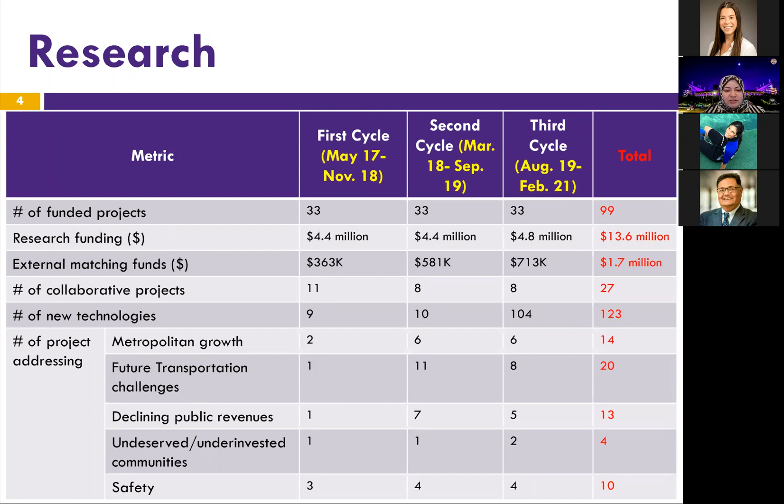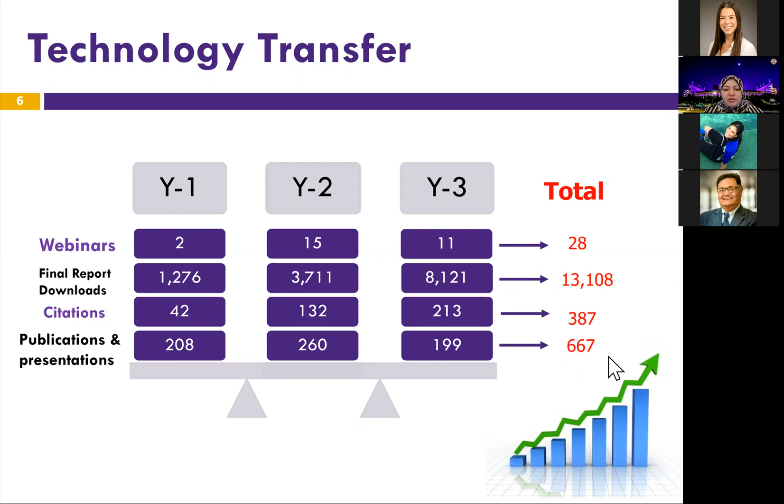With respect to tech transfer, we host webinars on a quarterly basis. To date, we have hosted 28 webinars. We also post all our publications, whether they are reports, presentations, or journal publications, on our website, and we look at the downloads, and as you can see, we have a large number of downloads.

With respect to workforce development, we host professional society related events and we participate in them. To date, we have participated in 182 events, and we also host seminars and workshops where we educate the industry on new technologies developed or focus on solving different challenges together.

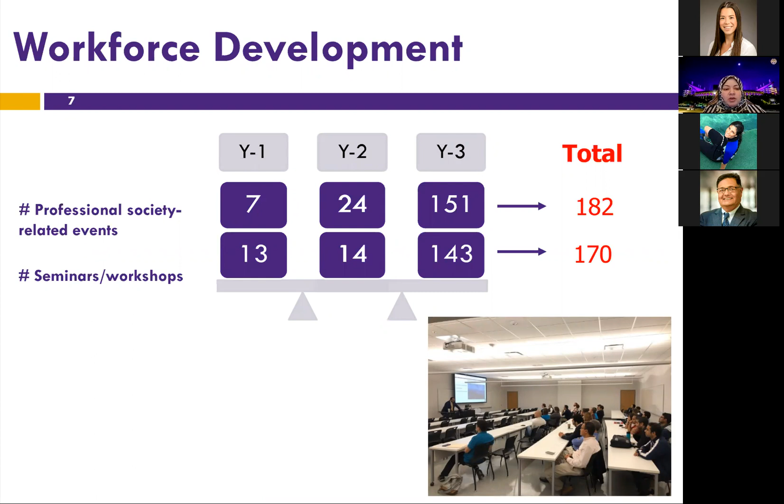We want to make sure that we are performing up to standard, so we have center metrics and we continuously monitor them. This is a snapshot of some of our metrics.

With respect to tech transfer, we look at the number of commercialized, patented, or licensed research products, and to date we have 21. We also look at the number of memorandums of understanding that we sign with our stakeholders, and to date we have 19.

With respect to education, we look at how many students are actually benefiting from our educational modules, so we look at the number of views, and we have almost 4,000 views to date. And how many students participate in our STEM events, and we have about 3,300 participating to date.

As for workforce development, we look at the number of people who attended the workshop, and we ask them for feedback by filling surveys. We have a little over 10,000 that have attended our workshops and seminars to date. We also look at how many of our stakeholders sponsor our events and how much they've contributed. We have 47 sponsors who have contributed a little over $400,000 to date.

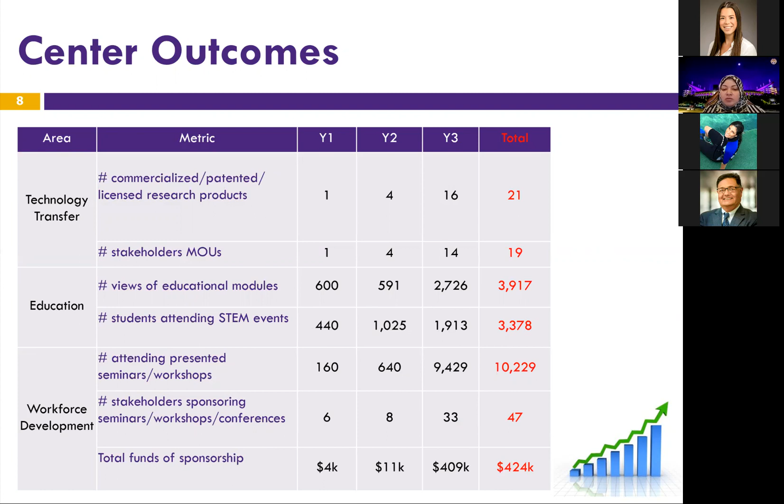As I said, we don't just focus on research, but we also focus on implementation. So this slide shows just some pictures of different implementation projects that we have to date.

So right here, these are implementation of pavement markings in a pavement marking project. And here, this bridge is constructed with ultra high performance concrete that was developed in New Mexico. And right here is actually the road in front of our College of Engineering building at LSU, and this mix is developed by us.

And I'm going to give a presentation. So part of my talk is going to be about ECC, but this is low-cost ECC.

And the funny part, and I'm sure Dr. Al-Qadi will get a laugh out of this, this is not a competitor to concrete. This particular mix is an actual competitor to flexible pavements. It has a very low compressive strength, but an extremely high ductility and flexibility, and so it behaves like a flexible pavement. It has been in place for a year and a half with heavy bus traffic, and it's performing very well, not a single crack.

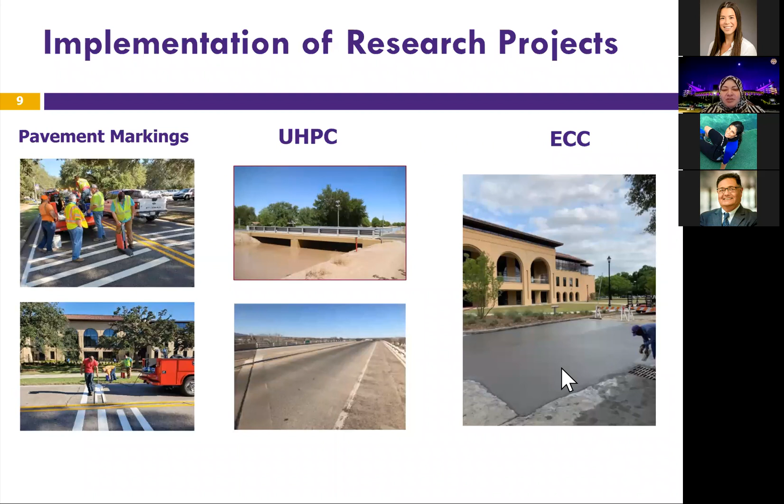In addition to this, we do a lot of many more activities. So this picture just shows some of the activities. If we look at this top picture right here, this was an event that was sponsored by Prairie View A&M,

which is a historically Black institution that is part of the consortium. They were exposing their freshman students to the field of transportation to increase the participation of students in transportation. This event included more than 70 students.

The second one is an actual implementation project that resulted from a Tran-SET project, and it was led by University of Texas at Arlington. They are currently doing a full depth repair using ultra high performance fiber reinforced concrete at the Dallas-Fort Worth airport, and it saved them over $1.5 million just because they didn't have to close the runway for a long time due to curing of concrete.

The third picture is from Arkansas State, where the students participated in an artificial intelligence demonstration. 30 students were featured in this demonstration.

The one on the left side at the bottom is an event that was hosted by Dr. Zahid Hussain and his students. They hosted an event for the industry, the DOTs, to educate them about their flowable fill concrete, the FCC mixes. This event was attended by 40 stakeholders.

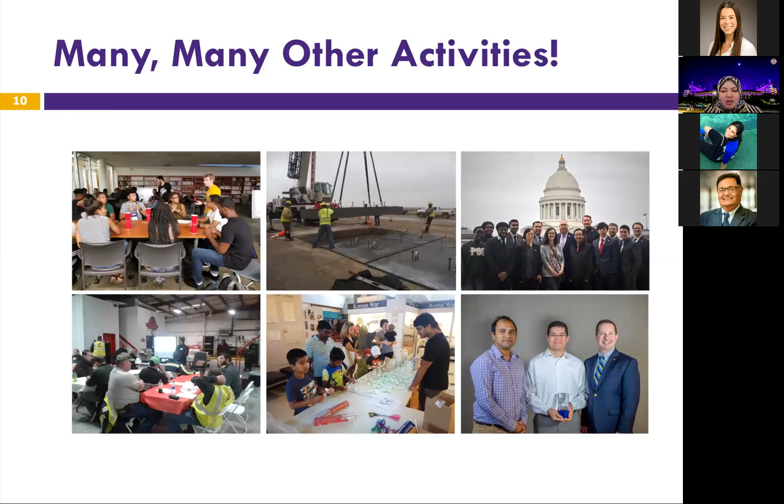This is a quick introduction about Tran-SET and what we do, and of course, we collaborate with a lot of other centers. I would love to collaborate with ICT as much as possible.

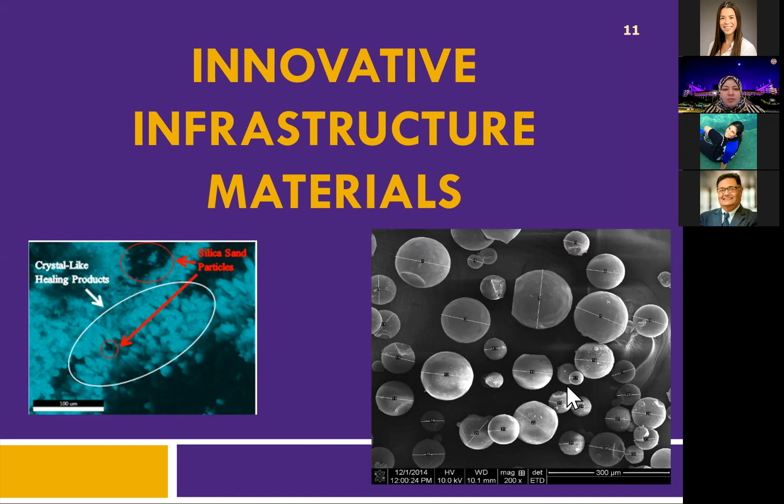So now I'm going to start talking about research, and I'm going to talk about innovative infrastructure materials. Here the focus goes more into our research group at LSU and our partners that work with us. We, over the years, have developed a lot of sustainable technologies, focusing on introducing new technologies that can enhance the sustainability, resiliency, and durability of the infrastructure.

A long time ago, we developed photocatalytic pavements. If you don't know what that is, it's a pavement that has nano titanium dioxide capable of absorbing pollutants like VOCs, NOx, and SO2s that are produced by traffic car mufflers, and neutralize them into salts that are washed away by rain from the surface of the pavement.

We had the first field studies in the US that tested both asphalt and concrete photocatalytic pavements. This picture is from a product where we recycled beer glass, like glass cullets, in asphalt shingles. We designed a new generation of shingles that can be a solution to the urban heat effect, and we actually applied for a patent for this technology.

This is self-healing concrete, and we have a lot of work going on in this area where we heal concrete with microcapsules that contain chemicals that can produce calcium silicate hydrate, so heal concrete with concrete. We also do a lot of work in bacteria self-healing concrete.

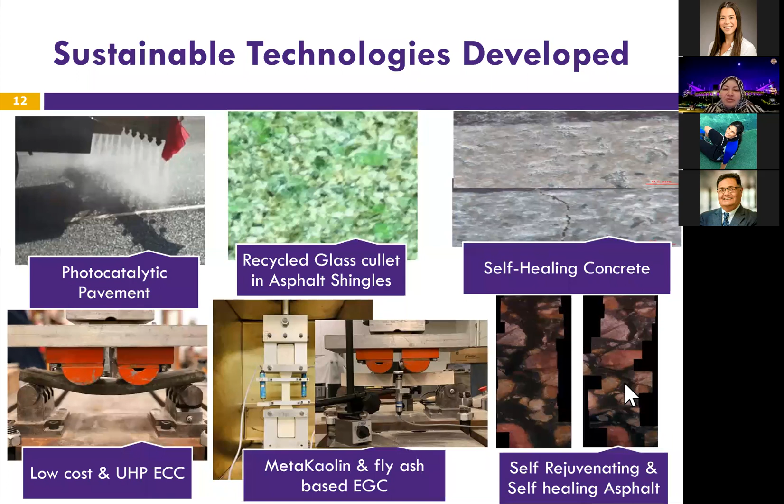The lower three pictures represent the technologies that I'm going to talk about today. We developed low-cost and ultra-high performance ECCs. I'm going to be talking about the low-cost ECC today. We also developed a new generation of material called engineered geopolymer composites, which are metakaolin based and fly ash based. We also developed self-healing, or self-rejuvenating, asphalt, which I'll also talk about briefly. So let's start with the low-cost engineered cementitious composites, ECCs.

There is a saying, if it isn't cracked, it ain't concrete. So we drive around all over and there are cracks everywhere in the concrete. Concrete is a very important material that we utilize not just in our pavement or even the infrastructure, but even in our commercial buildings, etc.

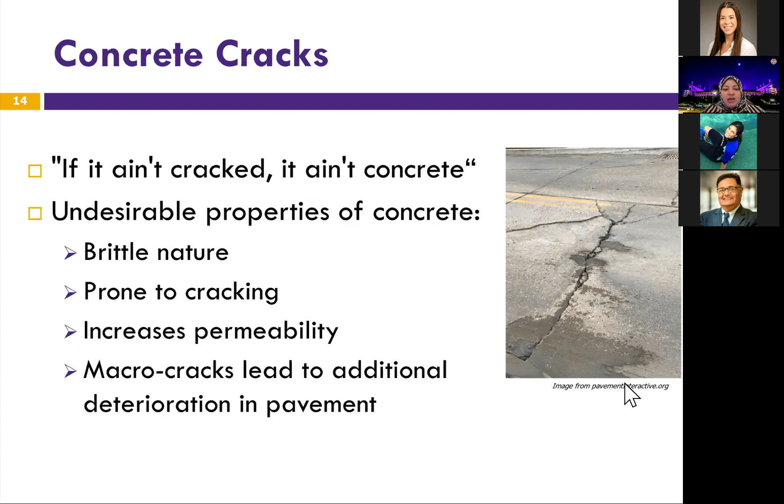Unfortunately, it's a brittle material, so it's prone to cracking. It also has permeability that increases over time, which allows deleterious substances to enter into the structure of the pavement, causing damage and lack of durability. In addition, concrete expands and contracts, and it has a high coefficient of expansion, which means we need joints in order to avoid cracks. But these joints are a major deterioration mechanism, so we see things like joint faulting, spalling, corner breaks, etc.

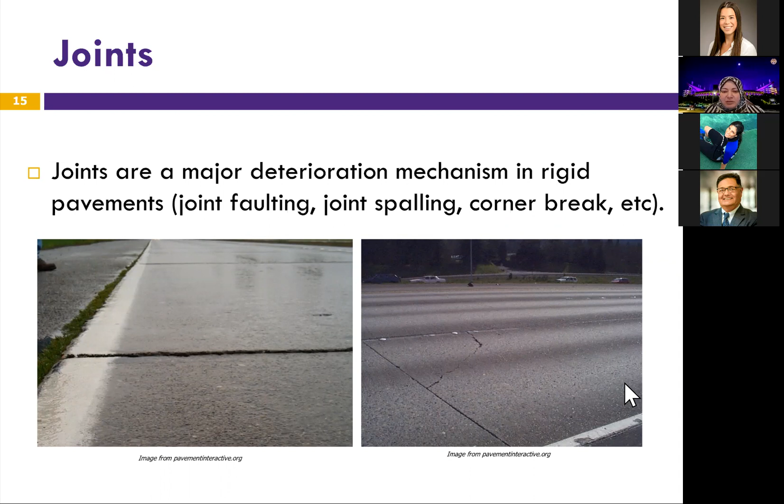One solution to a lot of these problems is the ECC. ECC is not new; it was developed about a couple of decades ago by Dr. Victor Li from the University of Michigan. The main advantage of ECC compared to concrete is that it exhibits pseudo-strain hardening after cracking. This leads to an increase in load carrying capacity with a significant increase in deformation, which allows us to produce bendable concrete like you see right here in this picture.

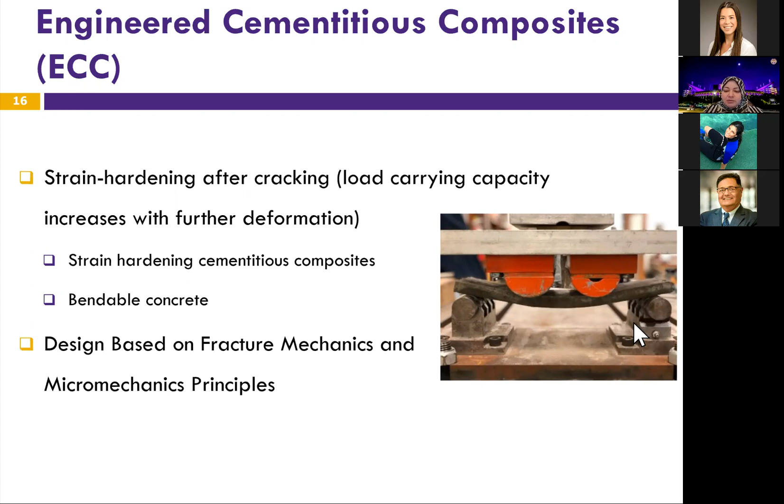So how do we design ECC? There are two basic criteria that must be met for successful design of ECC materials: the strength criteria and the energy criteria. The strength criteria warrants adequate fiber bridging capacity upon crack initiation, while the energy criteria guarantees the occurrence of steady state crack propagation. The strength criteria require that the maximum fiber bridging capacity, sigma naught, is larger than or equal to the matrix cracking strength, sigma critical. The energy criteria require that the complementary energy of the fiber bridging relation, JB, is greater than or equal to the crack tip matrix toughness, J tip.

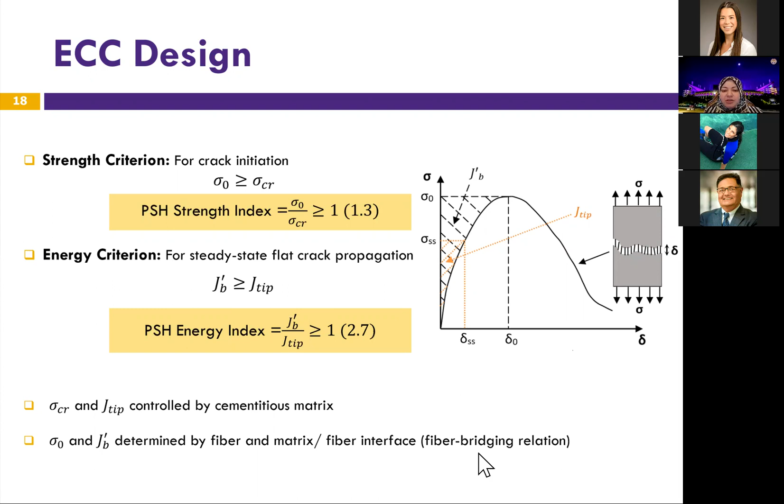The design of ECC is based on fracture mechanics principles. Sigma critical and J tip are controlled by the cementitious matrix, while sigma naught and JB are controlled by the fiber matrix interface. Both criteria have to be satisfied for us to get the pseudo-strain hardening behavior, and I'm going to talk about that more in a second.

So if ECC is so good, why is it currently not being used? It's because ECC has limitations. It's very expensive, and that's one of its most major limitations. It also has a high environmental footprint because it uses a lot of cement. And it's not practical compared to regular concrete because we have to put a lot of fibers, specific oil-coated PVA fibers, according to Victor Li at 2% volume fraction. That much fiber needs special mixing requirements for good dispersion, so not everybody can install it properly on site.

That's why it has not been advancing as quickly as we had hoped. When we started this research, we asked: can we solve these problems? We started looking at low-cost, green, and readily available ingredients that can replace some of the components of ECC.

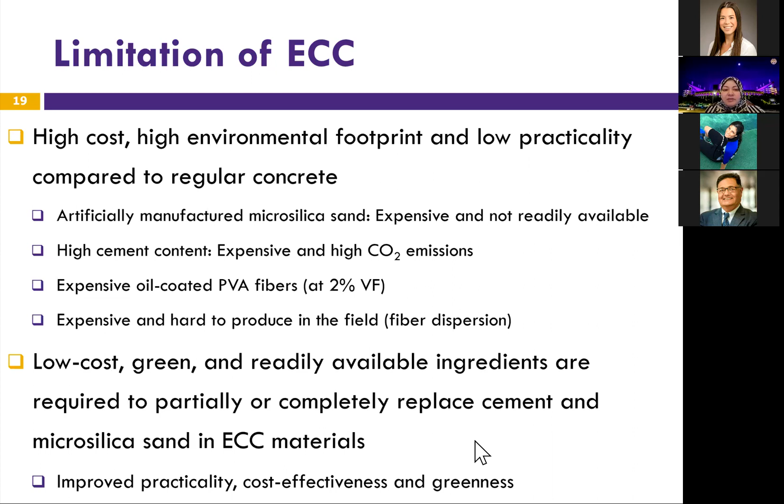So we can actually produce ECC that can be used in the field, we focused on developing low-cost ECCs. We started testing mixes that can work with non-coated PVA fibers to reduce fiber cost, and we also reduced the fiber volume fraction from 2 to 1.5 and 1.75, and got that to work.

Another expensive ingredient in ECC is microsilica sand, which has to be very round, very soft, very small, fine sand. So we replaced it with locally available materials present in Louisiana and Region 6. We also started replacing some of the cement content with high fly ash class F content, and experimented with using recycled content from crumb rubber.

We developed mixes that work, and I'm going to show you snapshots of what we've done. We also looked at other sources of ash besides fly ash, because fly ash, as we know, is going to run out very soon.

So we experimented with another type of ash that comes from sugar cane, called processed bagasse ash. We tested it as a cement replacement, and we also tested raw bagasse ash as a sand replacement.

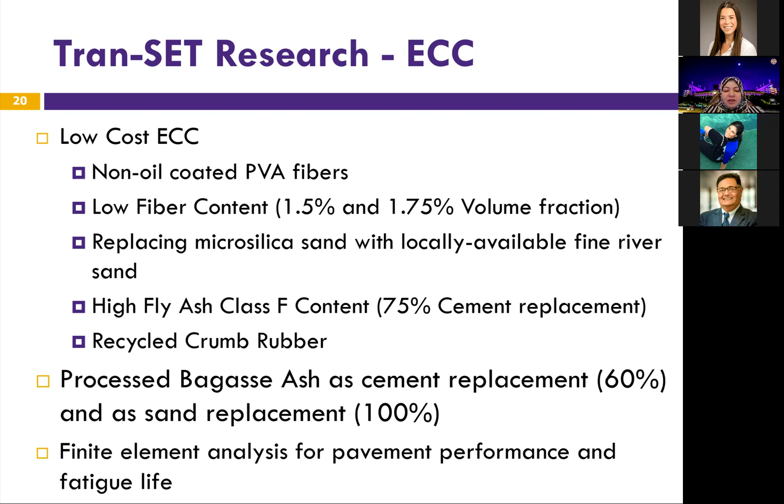We also did a lot of work with small field site implementations, and I'm going to show you some of these in a second. But we also built a finite element analysis model to predict pavement performance and fatigue life of ECC pavements. I'll start by giving more details about the low-cost ECCs that have fly ash and crumb rubber content.

In addition, replacing sand with crumb rubber caused a reduction in compressive strength. This drop is attributed to the defect-like behavior of crumb rubber in the ECC specimen, which probably reduces bonding within the cementitious matrix, in addition to rubber having lower stiffness.

We also saw that increasing the percentage of fly ash in the mix decreased the compressive strength. This can be attributed to the fact that fly ash may limit the secondary hydration reaction at 28 days. We only tested at 28 days, but I believe if we had tested later the compressive strength would have increased.

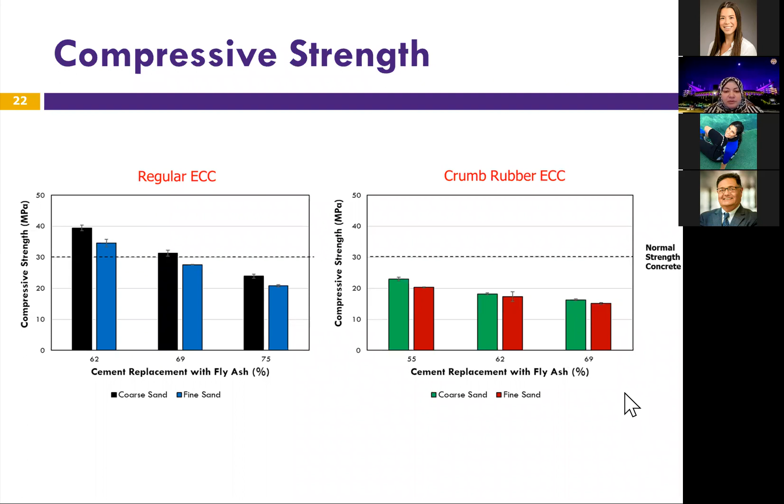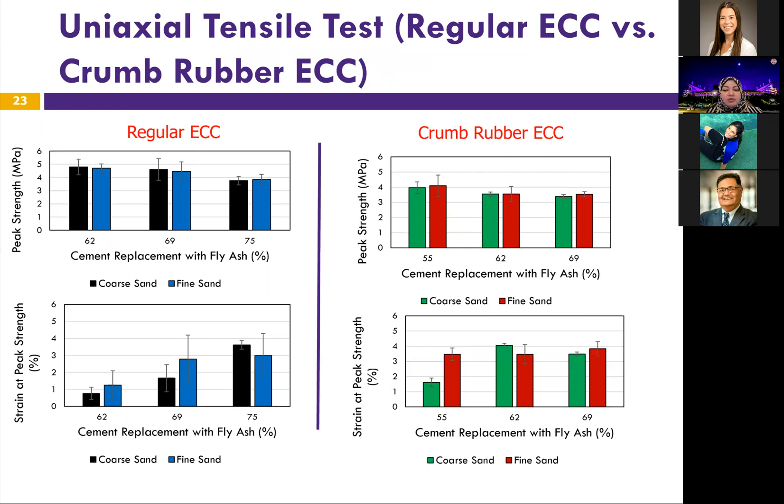Some quick conclusions: increasing the cement replacement with fly ash increases the ductility of the composite, however compressive, tensile, and flexural strengths were negatively affected. Chrome rubber produced a significant reduction in compressive strength and flexural strength, yet deformation capacity and strain were dramatically improved.

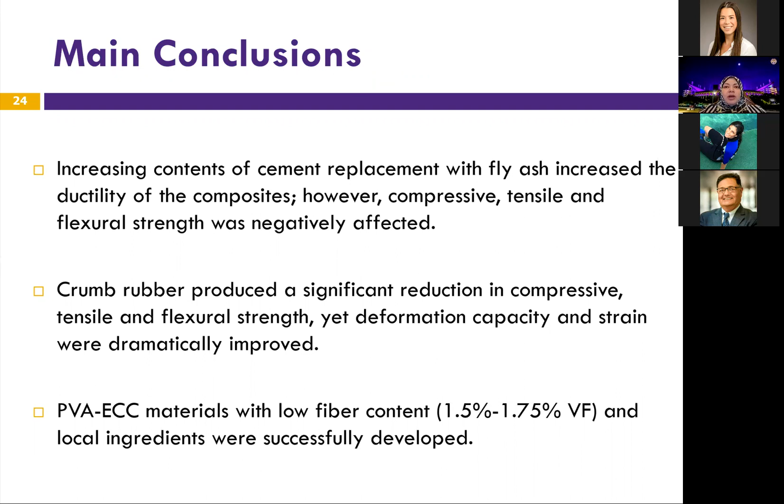Most importantly, we were able to develop PVA ECC materials with much lower fiber content—going from 2 to 1.5 and 1.75 volume fraction, drastically reducing cost. We successfully integrated local ingredients into these mixes, so ECC is now more cost competitive and can be used as a replacement in concrete pavement applications.

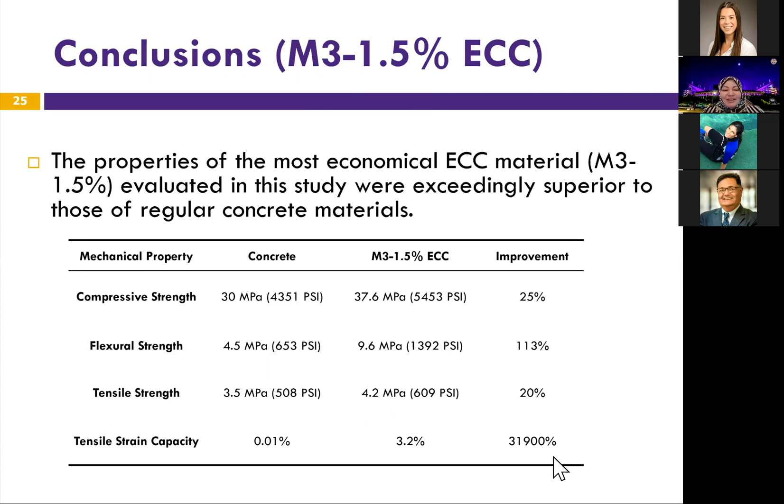This slide compares one of the mixes we developed, M3 at 1.5% volume fraction of fibers, with regular concrete. As you can see, it has 25% more compressive strength, 113% more flexural strength, 20% more tensile strength, and a 31,900% increase in tensile strain capacity, which is amazing.

Now I'm going to talk about the low-cost ECC that we created with bagasse fiber. So we first looked at fly ash, and now we're looking at bagasse fiber. What is bagasse fiber? It's a byproduct of sugarcane production, and it's a huge waste product in Louisiana.

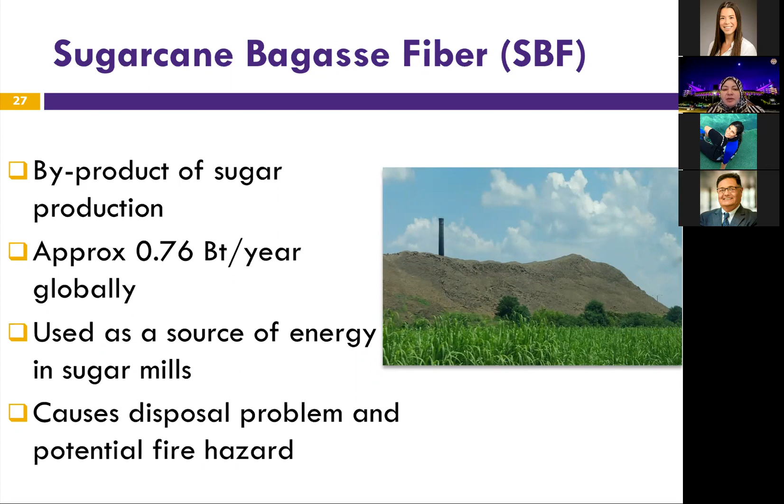Globally, 0.76 billion tons are produced each year. Some sugar mills use it as a source of energy, but only a little bit, and everything else is a problem because it's a fire hazard and needs to go to landfills.

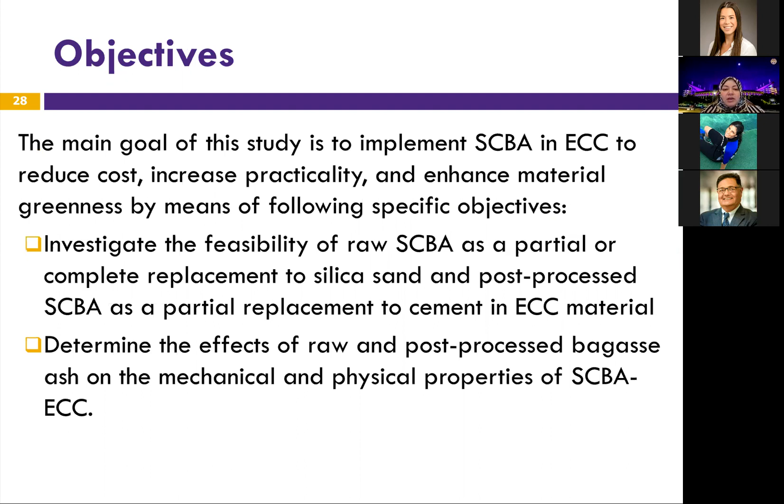So we said, can we process this bagasse ash so we can actually use it in ECC? We were thinking of two usages for the ECC: one as a cement replacement to reduce the content of cement, and one as a sand replacement to eliminate the river sand or the microsilica sand.

So we had to process the sugarcane bagasse ash first. This is what the sugarcane from the mill looked like. We dry it at 65 degrees and then sieve it, and by doing that we remove the coarse particles and get what we call raw sugarcane bagasse ash.

This is what we used as a sand replacement. If we further burn the raw bagasse ash at 450 Celsius for 3 hours and grind it at 300 RPM for 35 minutes, we get what we call processed bagasse ash. And this is what we use as cement replacement.

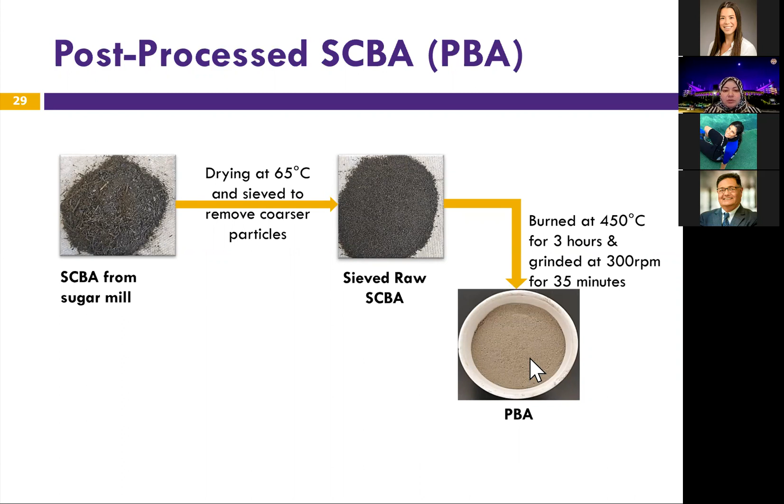We also analyzed the composition of the raw and processed bagasse ash using EDS. As you can see from the analysis, the raw bagasse ash is mainly composed of silicon dioxide and carbon. Of course, the carbon comes from unburned sugars. But if you look at the pozzolanic components, which is the silica oxide, aluminum oxide, and iron oxide, in the raw bagasse ash you get 52.6%, which makes it classified as a class C pozzolan according to ASTM.

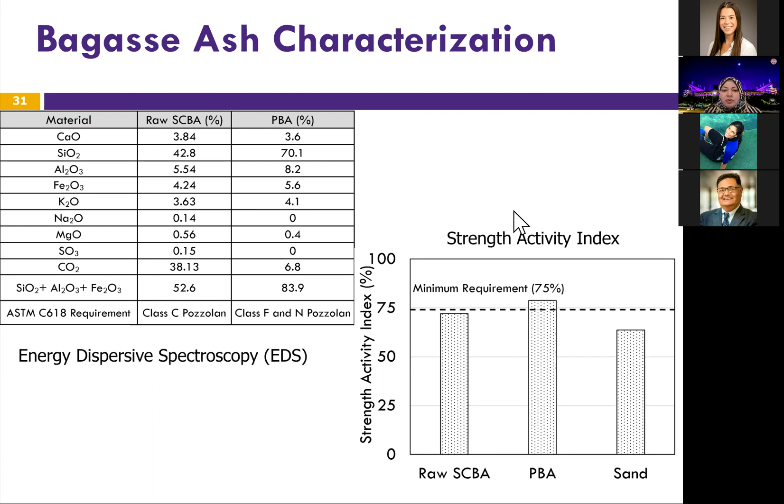Although we have a lot of amorphous silicon dioxide in the processed bagasse ash, which indicates a high potential for pozzolanic activity, the observed decrease in compressive strength can be attributed to the strength activity index. We saw that it was more than 75%, but it's lower than 100, so it's still not as high as it can be.

And the other thing is that since it's a pozzolanic material, we expect that it's going to take longer for it to reach its full strength, because the secondary hydration taking place can exceed the 28 days that we're testing at. It can take months or even years sometimes.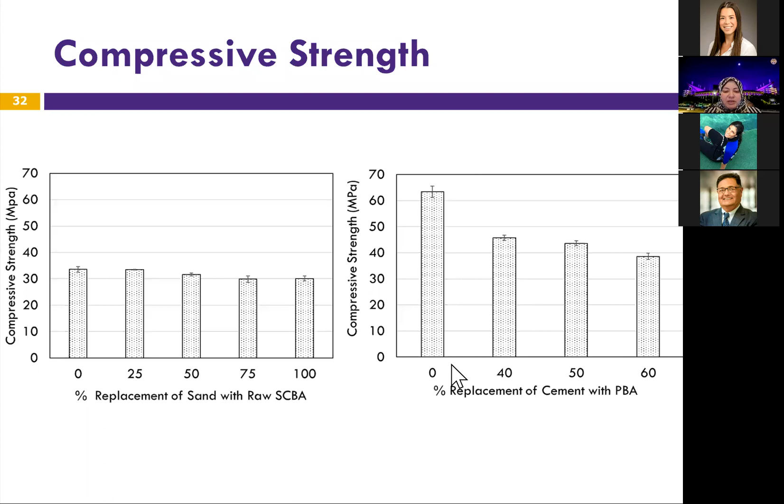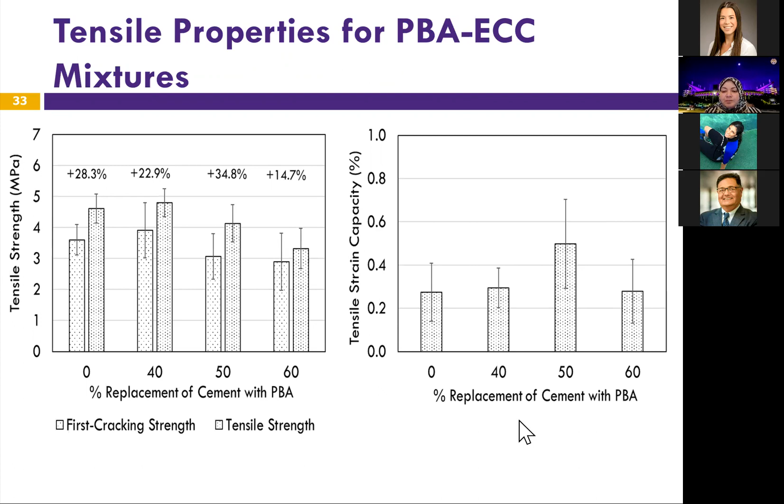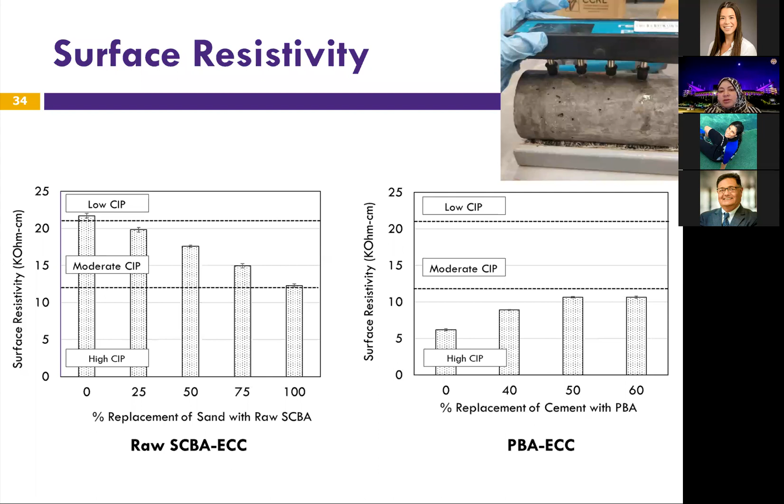Maybe this can be attributed to the fact that the fibers in the matrix hurt the pore structure, which allowed ions to penetrate through the matrix.

So, some conclusions. The most interesting part is that the raw bagasse ash and the processed bagasse ash both met ASTM standards to be used as a pozzolanic material. In general, compressive strength decreased with the increase in raw bagasse ash and processed bagasse ash. An improvement in the tensile ductility of 311% compared to control was observed in some of the mixes.

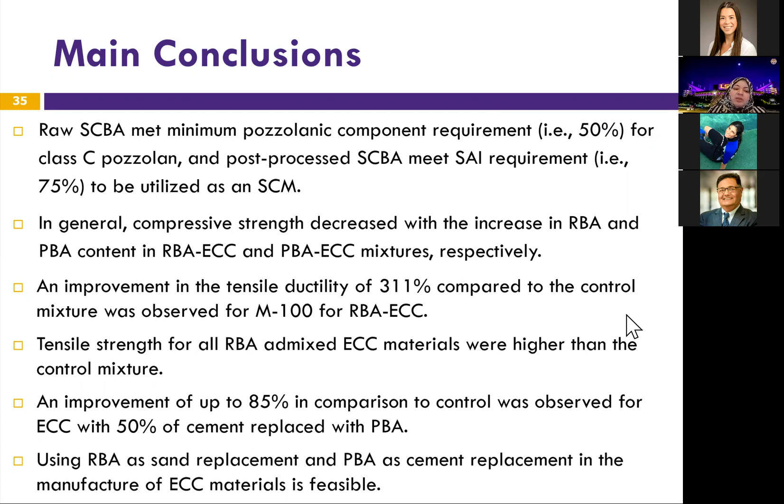The tensile strengths for all raw bagasse ash admixtures were higher than the control. An improvement of up to 85% compared to control was observed for ECC with 50% cement replacement with processed bagasse ash. So in conclusion, using raw bagasse ash as sand replacement and using processed bagasse ash as cement replacement is feasible, and that's going to reduce the cost of ECC drastically.

I'm not going to talk about the ultra high performance work we're doing because I wanted to visit different technologies, but I'll show you some ECC field applications we've done at LSU. When we started field implementation, we talked to facility services. All these people you're seeing are from LSU facility services.

We wanted to first try it in a place that does not have traffic, so we talked about sidewalks. The interesting thing about the LSU campus is that we have 100-year-old trees with huge roots, and they break the sidewalks over and over again. Facility services is very frustrated with this.

So we presented ECC as a solution because of its high ductility, and we installed it in a lot of the sidewalks. It has been there for 1.5 years. They don't even need to fix it. They loved it so much.

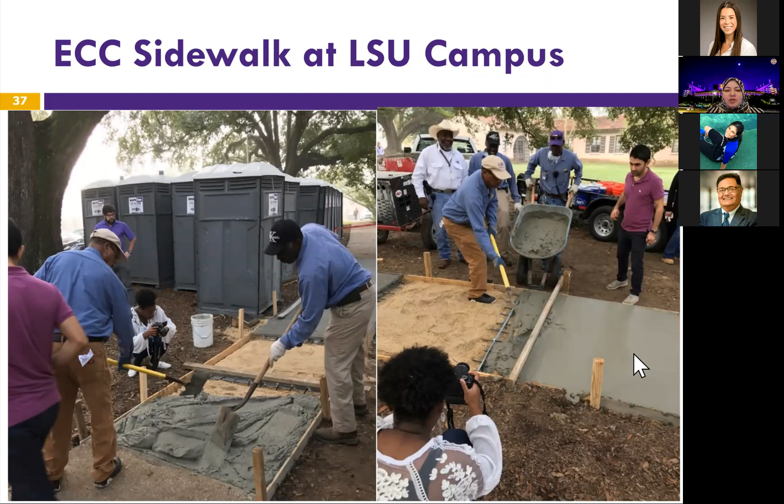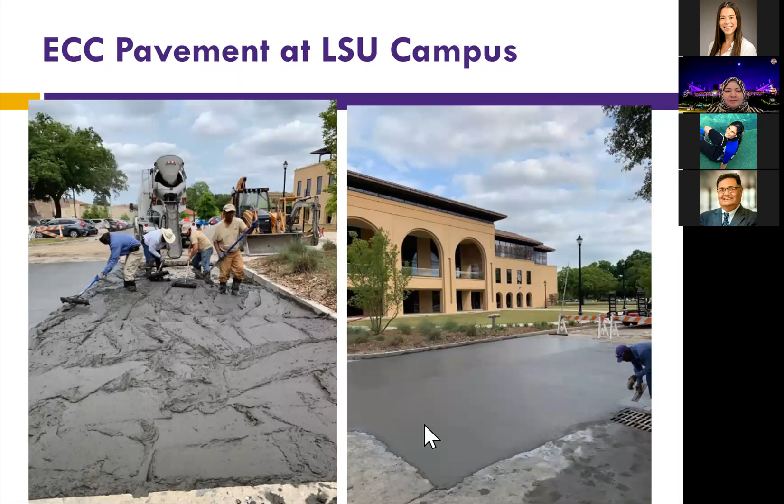They asked us to prepare some materials for them, and they use it for patching any cracks in the regular concrete all over campus. This is the mix I was telling you about at the beginning, which is in front of the College of Engineering building. And again, it has been performing very well.

We had a project where we wanted to do full-scale testing in an accelerated loading facility. So we built an ECC pavement in the Louisiana Transportation Research Center Pavement Research Facility. And you can see this is the loading wheel right here.

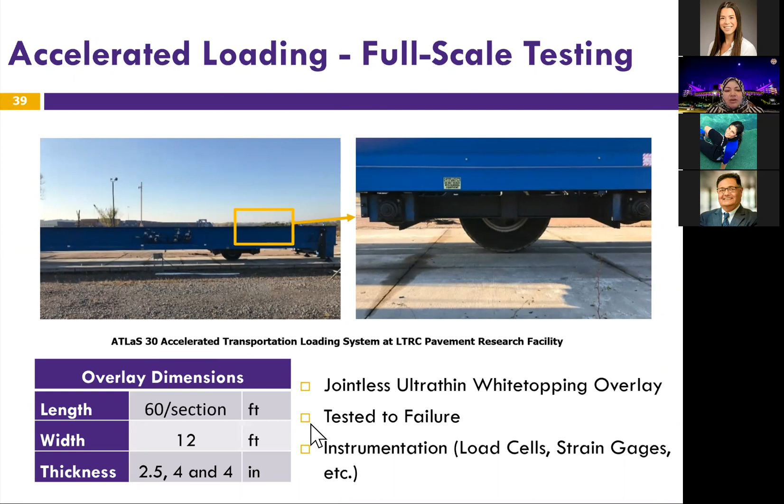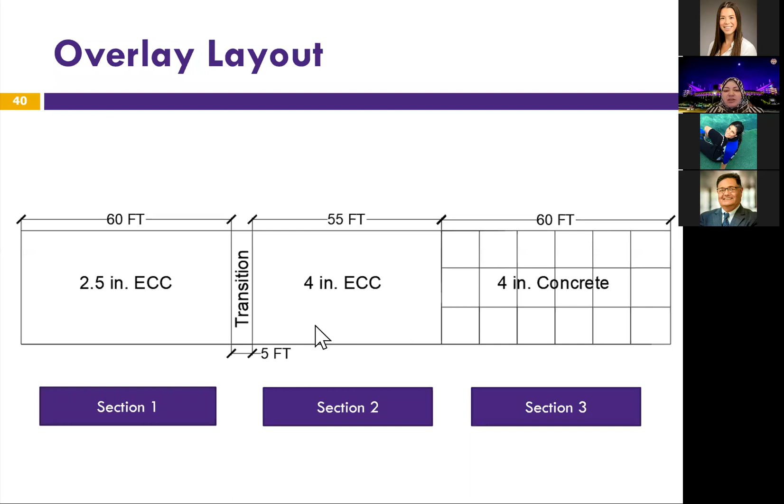It's an ultrathin whitetopping over an asphalt pavement, and we have 3 sections: a 2.5-inch thick ECC, a 4-inch thick ECC, and a 4-inch concrete that's going to be used as control. All the sections are instrumented.

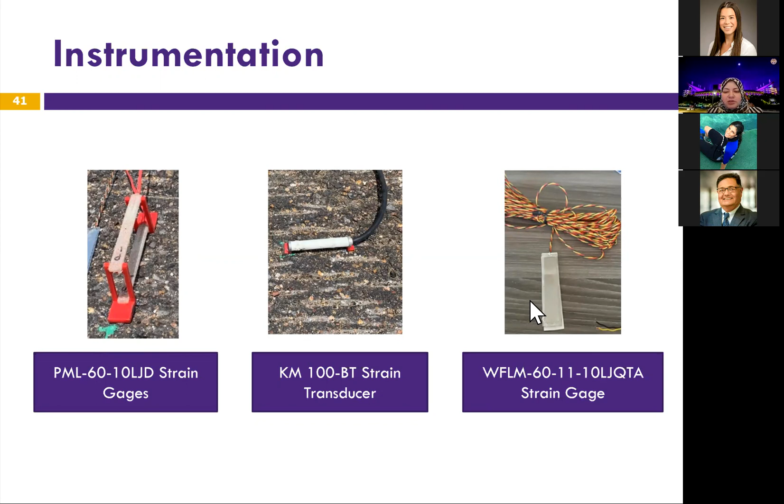As you can see here, we printed 3D supports for all the sensors so that they stay in place. This is a picture from the construction. We had 3 companies working with us: a concrete plant, Lemoyne construction company, and Icon.

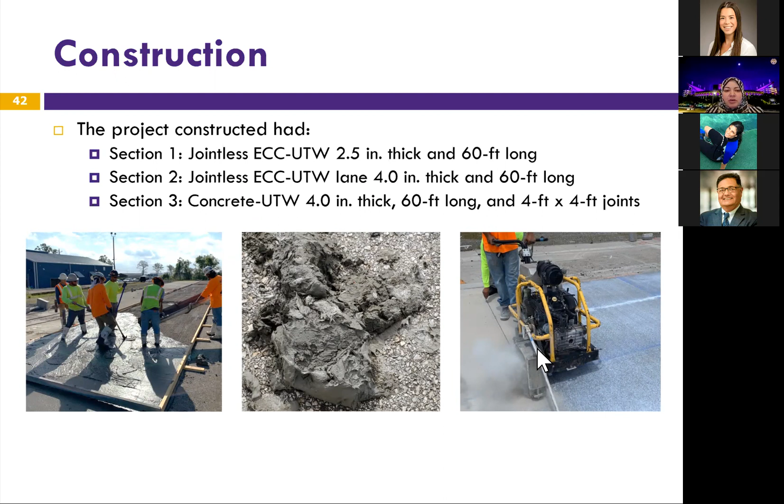We had workshops and webinars where we told them about the technology and how to mix it using their equipment. We also compared the mix that will come from regular construction equipment to what we're doing in the lab. We constructed the pavement, and now we're waiting for LTRC to start the loading so we can get some data. We have been collecting data on visual inspection.

Okay, with that, I'm going to shift topics to the next technology I want to talk to you about: engineered geopolymer composites, or EGCs. This work is a collaboration between our group at LSU and the Material Science Department at Texas A&M, led by Dr. Miladin Radovic. So what are EGCs? EGCs are nothing but geopolymer-based ECCs.

So why do we use geopolymers? The reason is geopolymers are better than concrete binders. If we compare them to Portland cement, we'll see that they have faster strength development because polymerization takes place much quicker than hydration does. It's more resistant to acid attacks and fire, and it's better at preventing corrosion of the steel reinforcement. In addition, it has a much lower footprint because geopolymer produces 44 to 64% less CO2 emissions compared to concrete. So why do we use it in ECC?

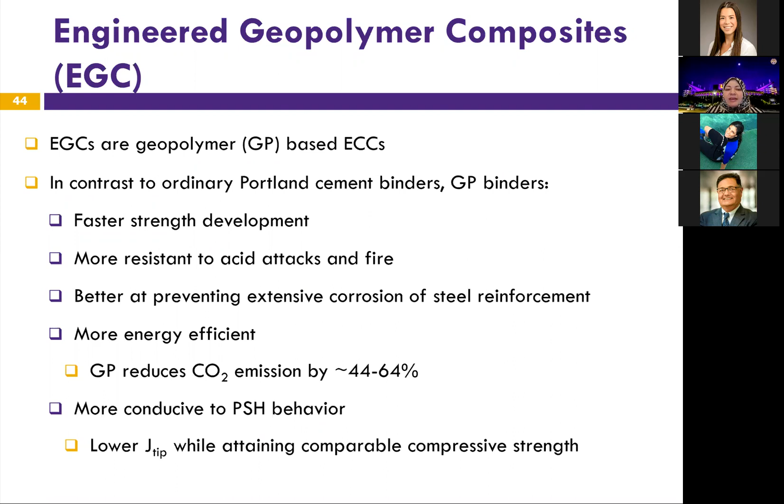If you remember the design criteria I talked about to get the pseudo-strain hardening behavior, with EGCs, with geopolymers in general, the J-tip that is needed to attain the design is much lower at comparable compressive strengths. So it lends itself to engineered geopolymer composites.

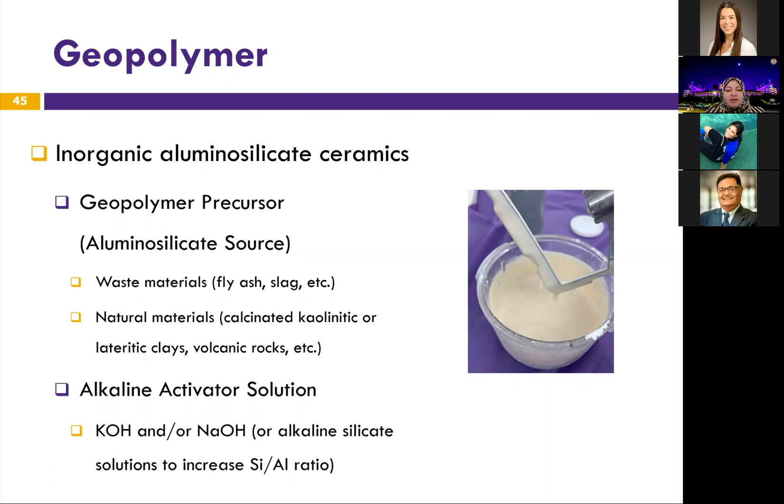Okay, so how do we make it? You start with a geopolymer precursor and an activator solution. The geopolymer precursor is an aluminosilicate source, and it can come from waste material like fly ash, slag, etc., or from natural materials like calcinated kaolinites. One example is the metakaolin that we used in this project. The alkaline activator solution can be sodium-based or potassium-based, and we sometimes add alkaline silicate solution to increase the silica to aluminate ratio.

So what we were trying to do here is develop mixes that can be used as engineered geopolymer composites. We wanted to develop mixes that were metakaolin based, which we're going to call MK, or metakaolin fly ash based, which we're going to call MKFA. This work started a year ago, and we had our first publication at this TRB. This work is going to continue with us for the next couple of years. But to design these mixes, we varied binder composition, aggregate types, and fiber type and content.

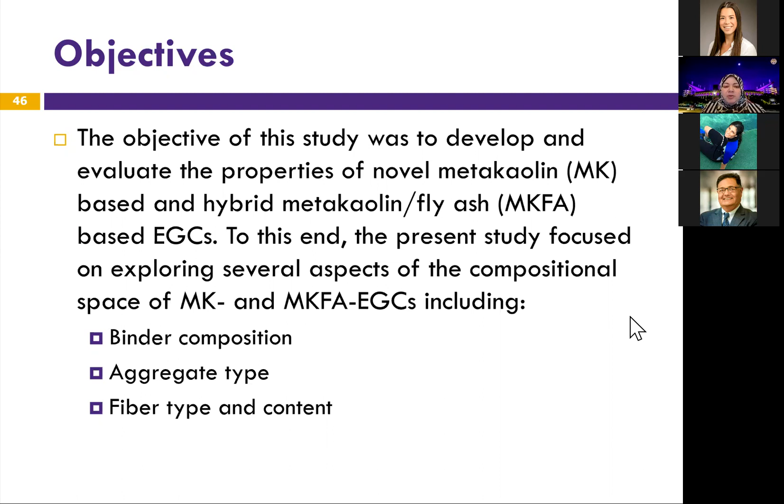So the ingredients that we used for that first project included the geopolymer precursor as either metakaolin or a hybrid between metakaolin and fly ash, used as 50-50. The activator solution was potassium hydroxide and sodium hydroxide mixed with silicon dioxide. And we tested two aggregates, river sand and microsilica sand. Then we tested two fibers. We used the first fiber that we used for our ECC, which is non-oil coated PVA fiber. But that is still more expensive than ultra high molecular weight polyethylene fibers. So we wanted to experiment with these two.

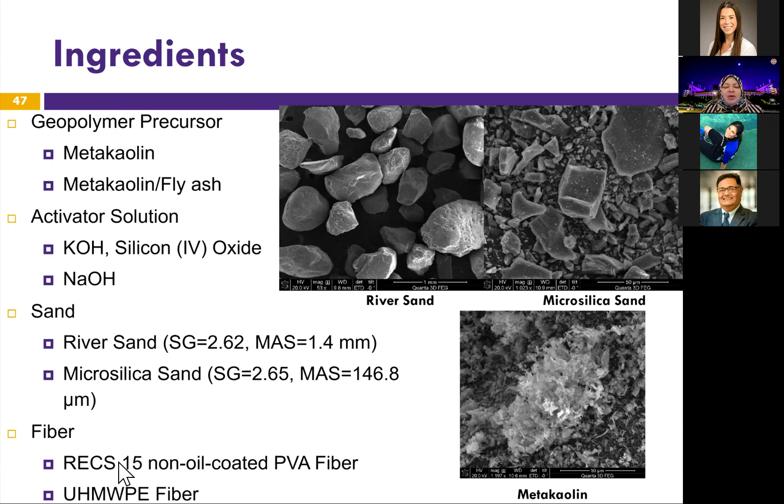And that's when one more partner from Texas A&M, Dr. Svetlana, joined the group. She, with her group, are developing the polyethylene fibers in their labs, which is really cool because I'm going to show you part of the results that's very interesting. This is very new. We got the first result of this about a month ago, and it needs a lot more work, but it's very encouraging.

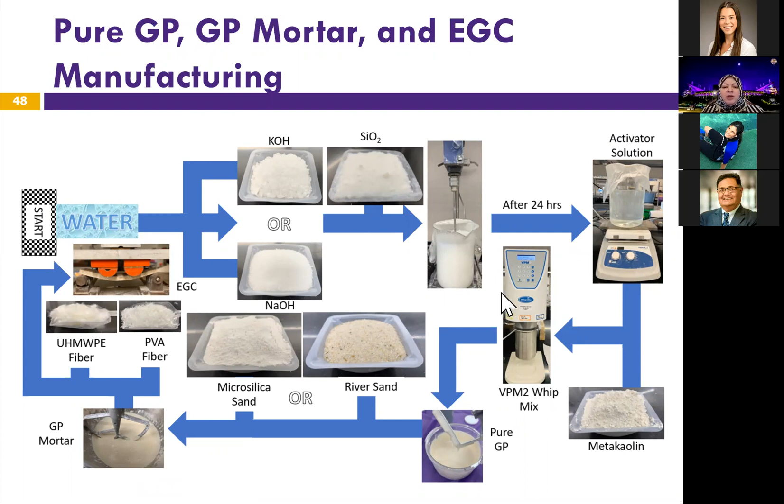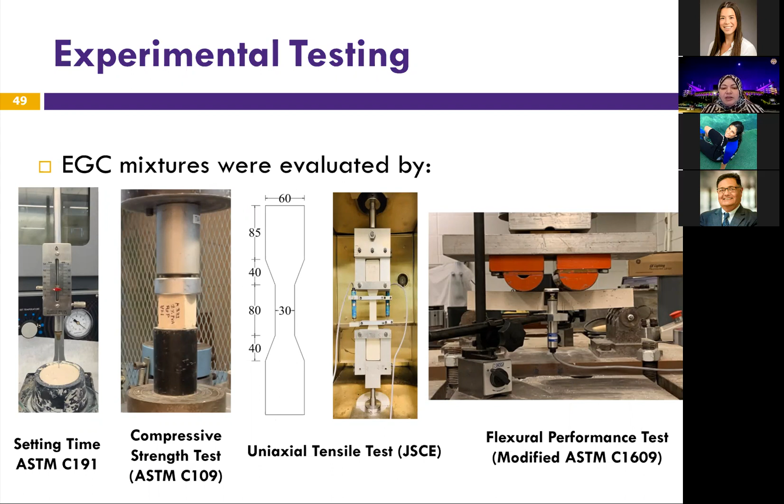We did a whole spectrum of testing, setting time, compressive strengths, uniaxial tensile test, flexural strengths. And now I'm going to show you some of the results.

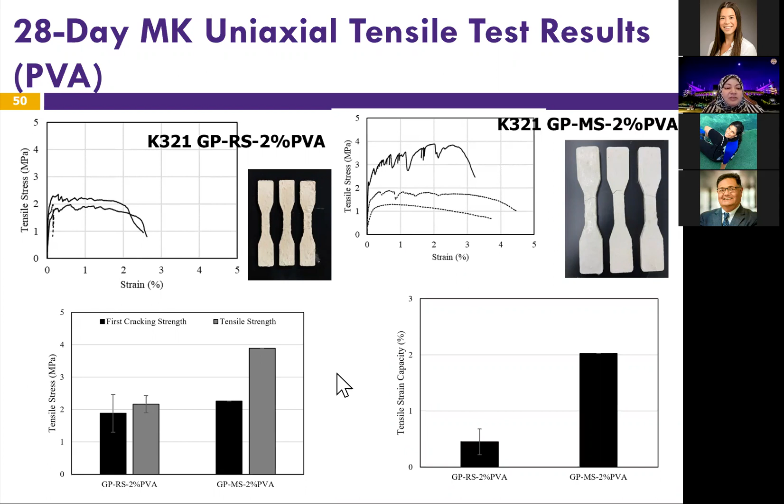So the first thing is we were able to successfully produce the EGC mixes. We got pseudo-strain hardening behavior, as you can see here. This figure shows the results of the 28-day metakaolin uniaxial tensile strength test. The specimen with the microsilica sand presented the best tensile behavior by exhibiting greater tensile strength and tensile strain capacity, but the river sand still worked, so they both can be used.

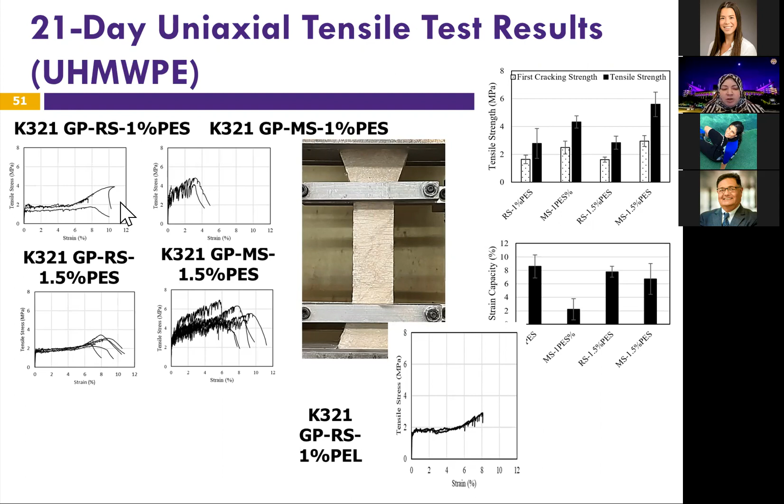This is the part I was telling you about that's very interesting. The polyethylene fibers that Svetlana is developing are actually working quite well. Let me go back here. If you notice, it's 2% volume fraction of fibers here. But we are only using 1% with the polyethylene. We are getting very encouraging results at a much lower volume fraction, which will reduce the cost drastically. We are experimenting with both long fibers and short fibers, because the more we can use existing fibers or low cost fibers, the more the cost of the EGCs will come down. So I'm very excited about this.

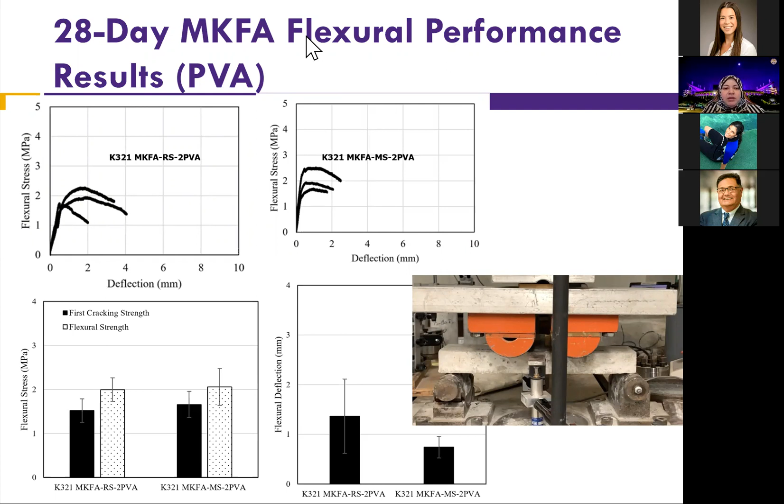Unfortunately, the metakaolin fly ash combination did not perform well. As you can see, it's behaving like regular concrete. It gave us a single crack when we did the flexural performance test. So to date, this is not behaving like an EGC, but we are going to start working on varying the percentages of metakaoline and fly ash. As I said, this research was done at 50-50. We may end up doing 20% fly ash, 80% metakaoline.

So quick conclusions. The tensile pseudo-strain hardening behavior of metakaoline-based polyethylene EGCs and PVA was superior to the PVA EGCs, but they both worked. The PVA specimens consisting of microsilica sand produced a superior tensile strength to that of the river sand. The opposite was observed with the polyethylene specimens in terms of ductility. The metakaoline fly ash did not work. It did not produce pseudo-strain hardening behavior, so we cannot classify it as an EGC, but we're going to work on that.

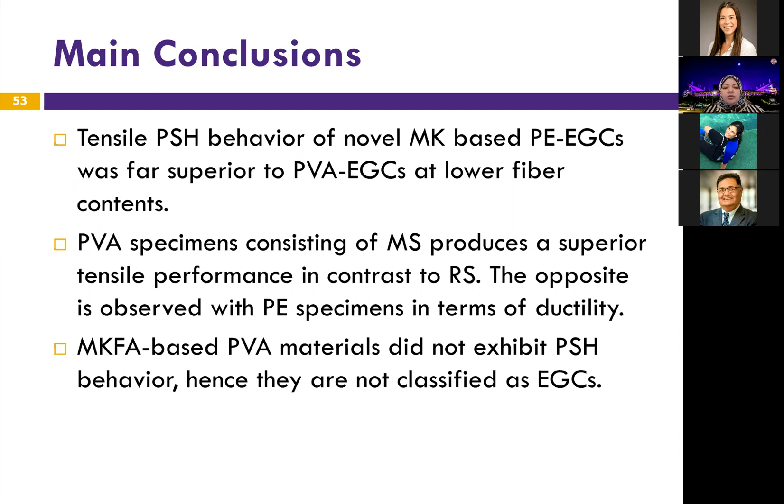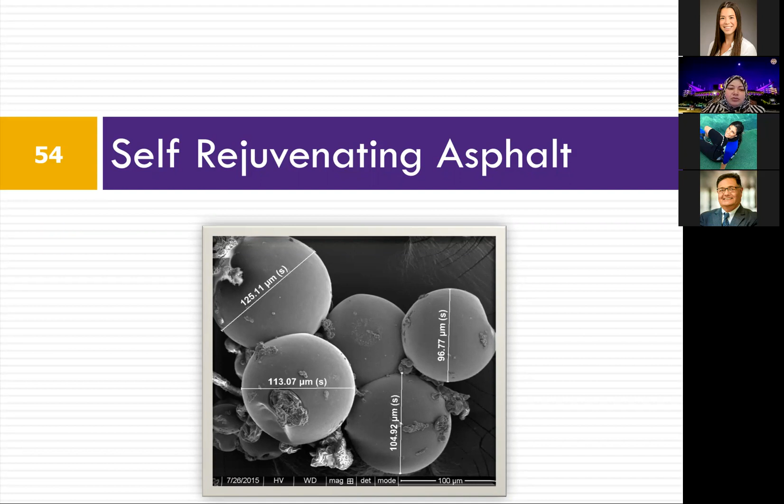Now, the last interesting technology that I'm going to cover is self-healing, or self-rejuvenating, asphalt. It's self-rejuvenating more than self-healing. And the whole idea is, as we all know, asphalt pavements age over time. So as a solution to this, we use rejuvenators or softening agents to reverse the aging of the binder.

One of the problems with using rejuvenators and softening agents is that they do not penetrate through the depths of the pavement. So the whole idea behind this research was, can we place the rejuvenators inside the pavement during construction, and it will automatically release the rejuvenator when needed as the pavement ages over time. Two mechanisms were tested in this research to deliver the rejuvenating product, microcapsules and fibers, and I'm going to give an overview of both quickly.

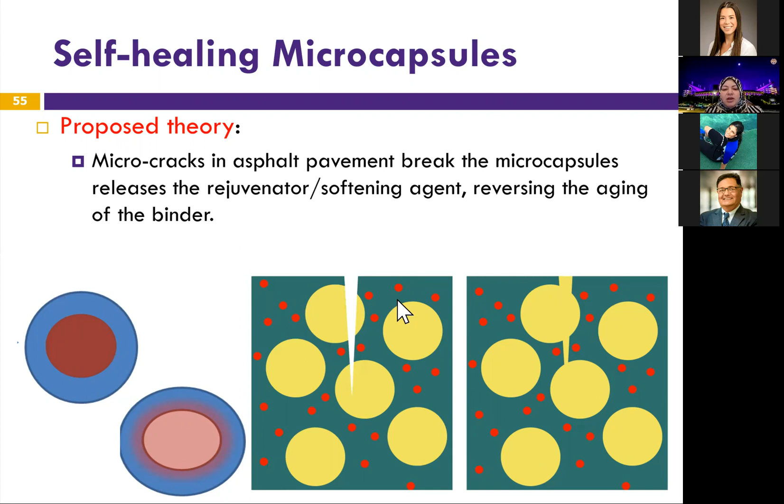So we start with the microcapsules. As you can see here, there is a urea formaldehyde shell that has the rejuvenator inside. It's mixed within the asphalt mixture. And when the asphalt starts to crack, it breaks the shell, releasing the rejuvenator, and it only releases a little bit at a time, so it does not over-soften the binder.

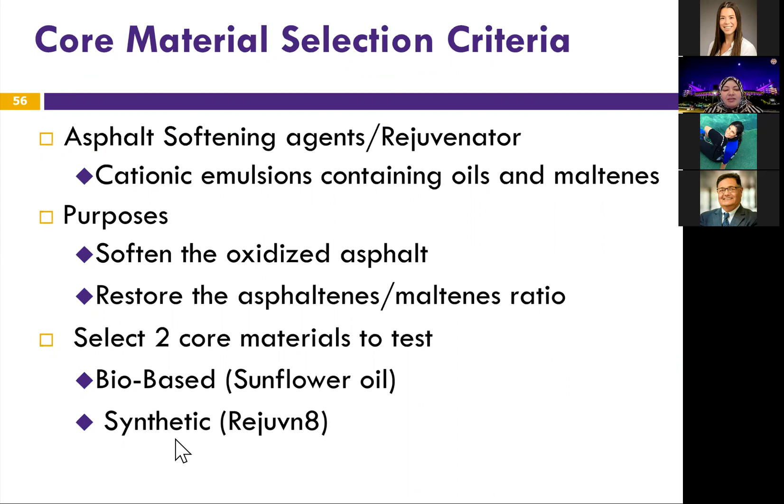We experimented with two different core materials or rejuvenators, a bio-based oil, sunflower oil, actually the one we use for cooking. It worked very well. And a synthetic one, which is known as Rejuvn8.

Okay, this picture shows an SEM picture of the microcapsules that we developed, and we are able to control the shell thickness, the diameter, the morphology by changing the parameters of the process with which we're creating the microcapsules, like the agitation rate.

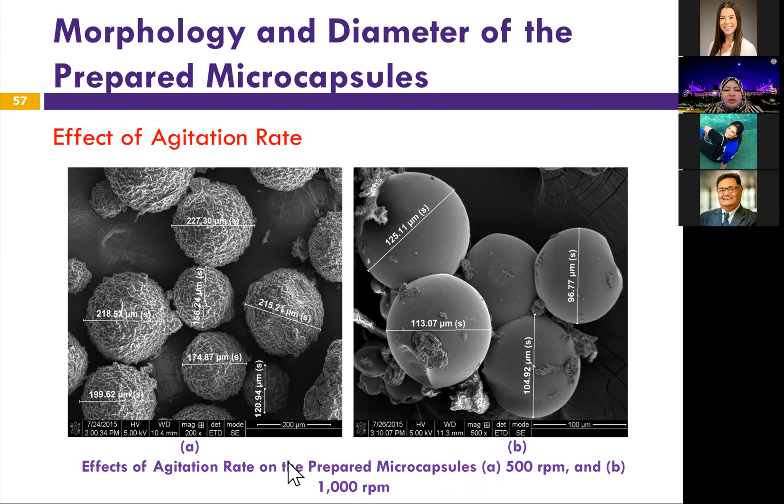Then we measured the healing capacity. We prepared hot mix asphalt beams. We induced cracks in them and then left them to heal. And then after that, looked at how the cracks are closing over time, or the size of the cracks decreasing over time. And then we also measured the stiffness before and after to get the stiffness recovery.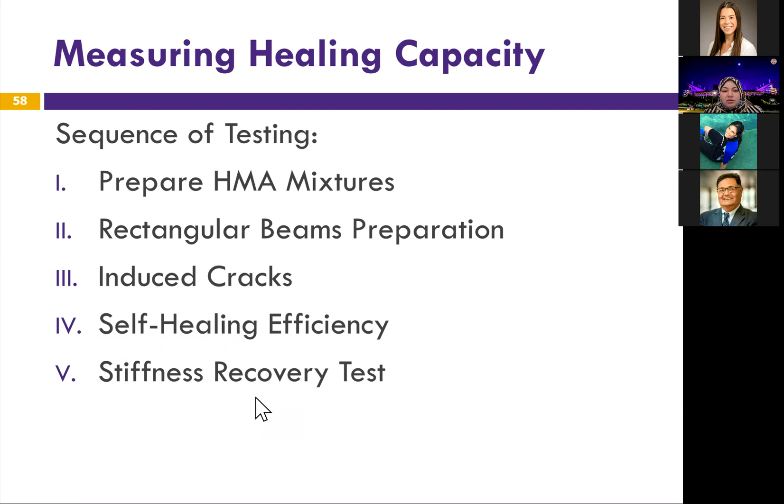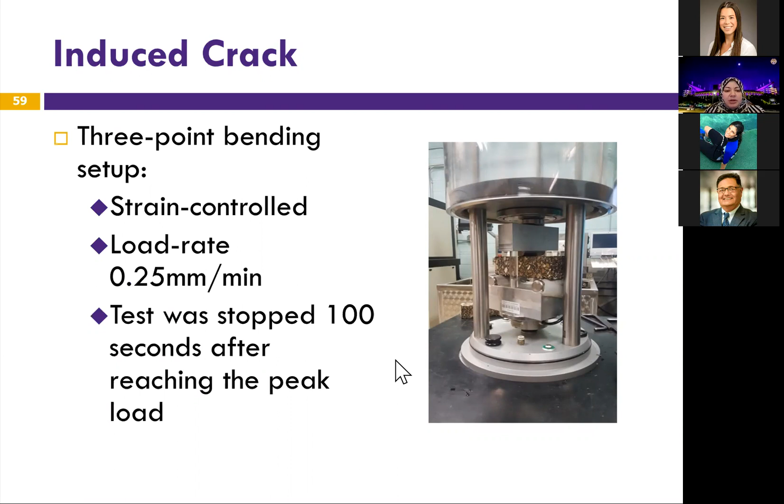So as you can see, here is the beam being tested. It's a 3-point bending, strain controlled, with a load rate of 0.25 millimeter per minute. The test was stopped 100 seconds after reaching the peak load.

So it just induces a crack. The healing process took place over 6 days. We looked at the crack size using a light microscope on a daily basis. And we put the specimens in two curing conditions, room temperature and high temperature, which is 50 degrees plus or minus 2 degrees Celsius. And we calculated the healing efficiency.

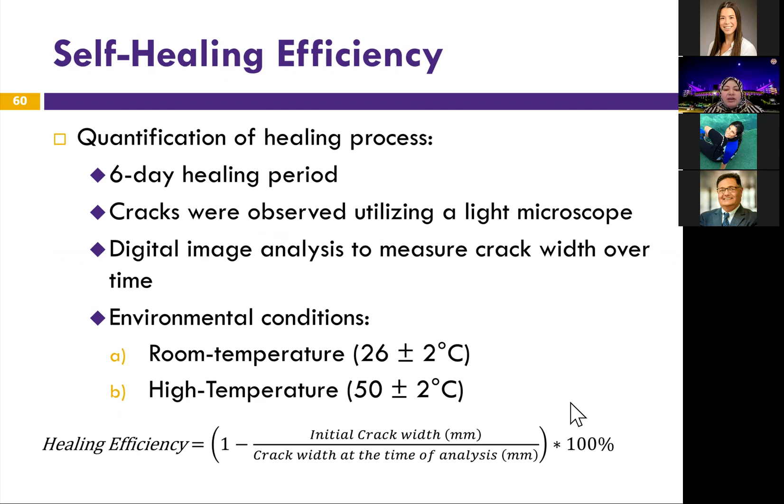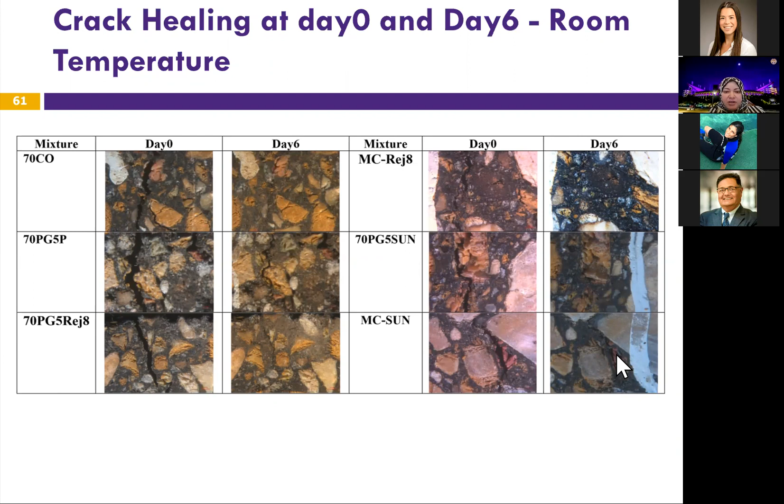And if you look at the crack, after 6 days, there is significant healing in all of the specimens, including the control. The actual healing efficiency agrees with what you just saw visually. And as you can see here, the rejuvenators are healing very well, whether the sunflower oil or the Rejuvn8. The microcapsules are lower than the rejuvenator, and that's expected, of course, because not all capsules are going to break. But whatever capsules break are the ones that are in the line of the crack.

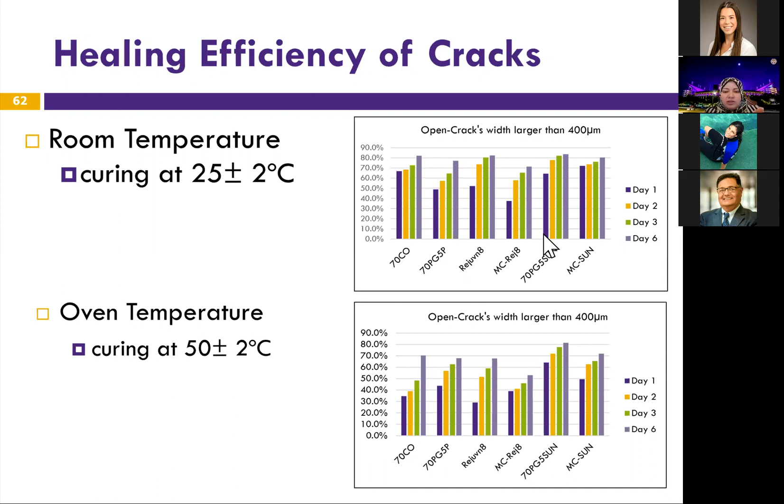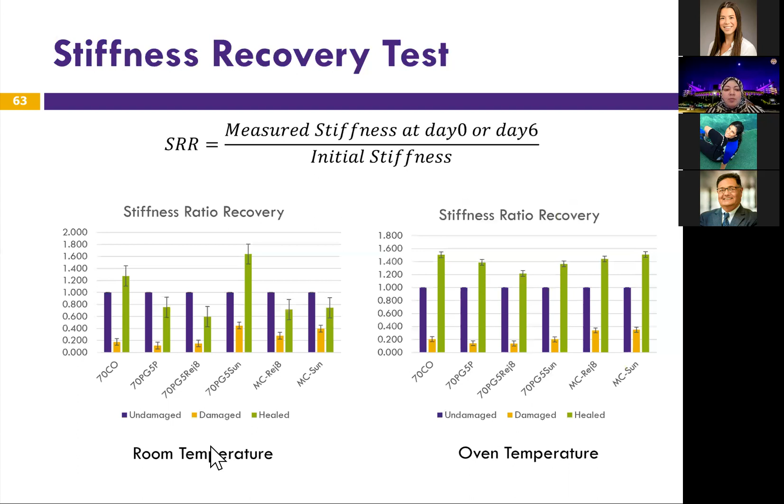Now I'm going to talk about the second delivery method, which is the fibers. These fibers are sodium alginate fibers. And again, this is a biodegradable natural material that is a waste material. The sodium alginate is polymeric in nature too, which gives an additional advantage.

So why did we choose sodium alginate? It's inexpensive, it's organic, it's non-toxic, it has low impact on the environment. It self-degrades over time, which makes sense because it's going to release the rejuvenator over the service life of the pavement. And because it's a polymer, it may improve the elastic performance of the binder itself.

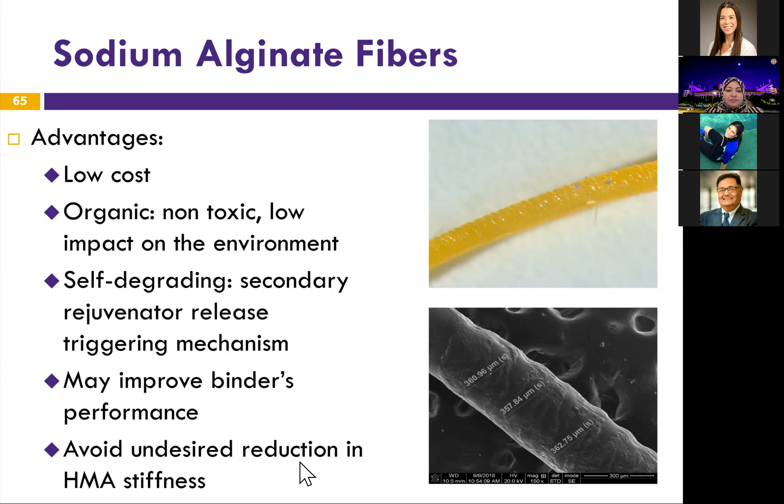So let me show you this video quickly. This is how we are producing these fibers in the lab.

So we developed a synthesis procedure to prepare the sodium alginate fibers containing the rejuvenators. We used what we call a wet spinning process. That's what you're seeing in the video.

The core material is the bio oil, the Rejuvn8 that we just talked about with the microcapsule study. Inside this basin, there is a liquid, a coagulation bath that is made out of 0.6 molarity calcium chloride hexahydrate solution.

So how do we produce these fibers? We take 5 grams of sodium alginate and dissolve them in DI water.

And we also prepare what we call a polymeric surfactant solution, or PIMA. We do that by dissolving the copolymer in water at 70 degrees and mixing it for 60 minutes. Then we leave it to cool.

The healing solution is mixed with the rejuvenator by different percentages by weight of rejuvenator. The PIMA is used for stabilization of the healing solution. Then we mix this mixture with sodium alginate at different rejuvenator to sodium alginate ratios at 40 RPM for 20 seconds.

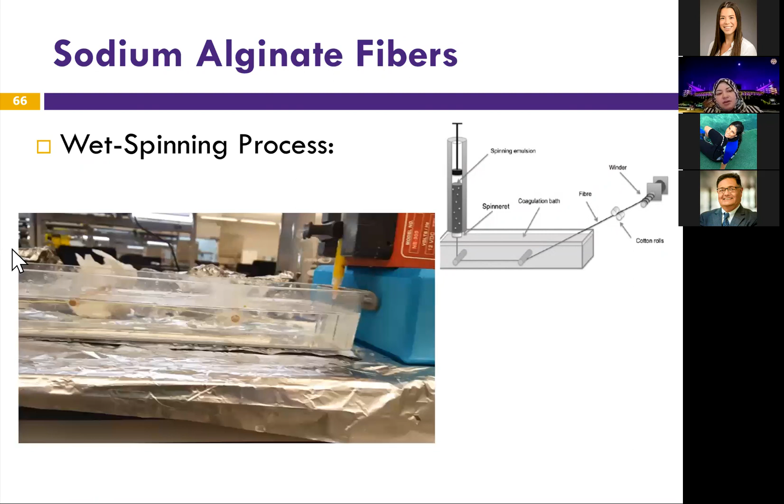Once we have that, what you are seeing here is the solution in a syringe. It passes through the bath, and then you can see that we are collecting the fibers right here.

This process actually gave us very good results. I'm just going to show a snapshot of the results like I've been doing.

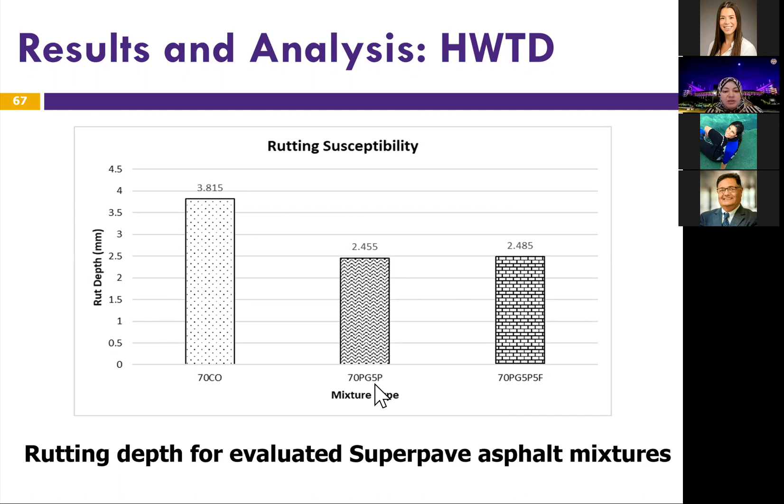So this is results from the HWTD. As you can see, the rutting depth has improved drastically. So this is the control, this is the mix with 5% RAS, and this is the mix with 5% RAS and rejuvenator.

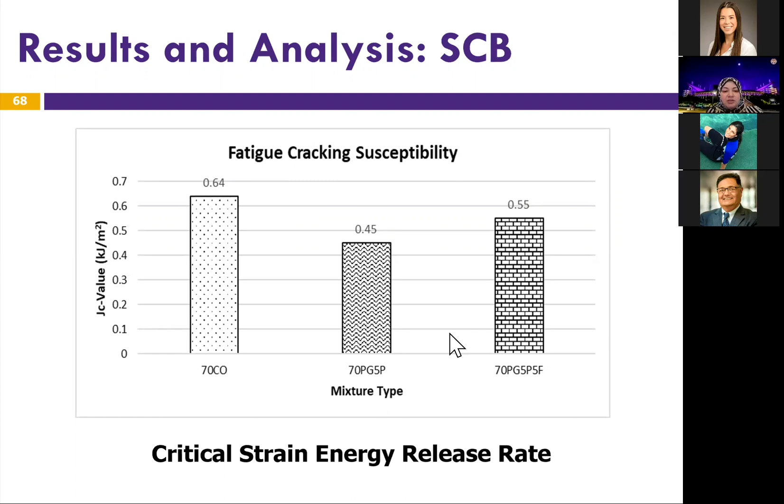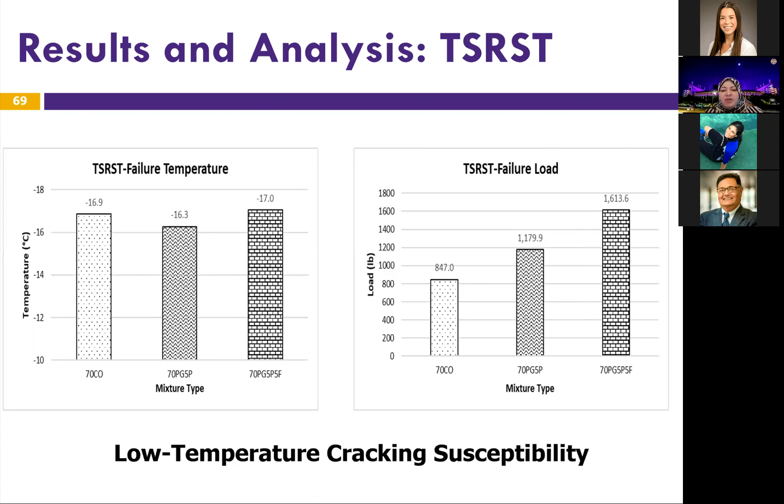For SCB, it also improved the fatigue cracking susceptibility over the mix with 5% RAS, as you can see here. For low temperature cracking susceptibility, the temperature is also almost the same for all of them, -16 to -17, but there is a large improvement in the failure load with the sodium alginate fibers.

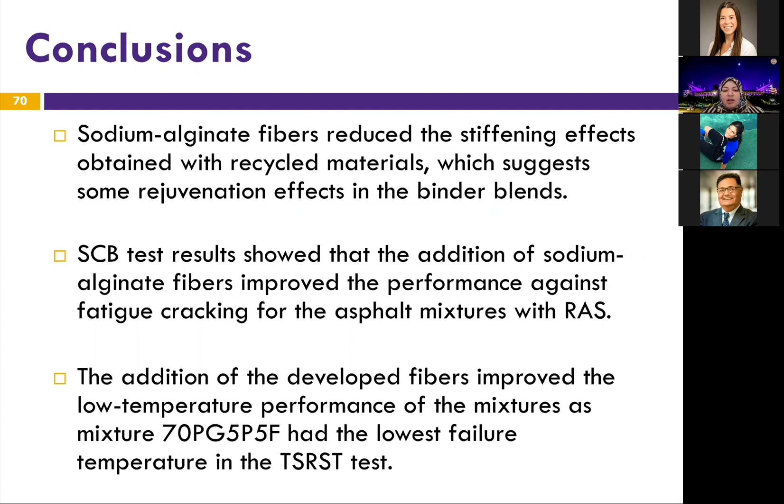So in conclusion, the sodium alginate fiber reduced the stiffness effects obtained with recycled materials, which suggests that the rejuvenation effect is taking place. The SCB test showed that addition of the fibers improved the performance against fatigue cracking. And the addition of the developed fiber also improved the low temperature performance, as we have seen in the TSRST test. With that, I conclude my presentation.

And I know I am a little bit over time, but we still have time for questions.